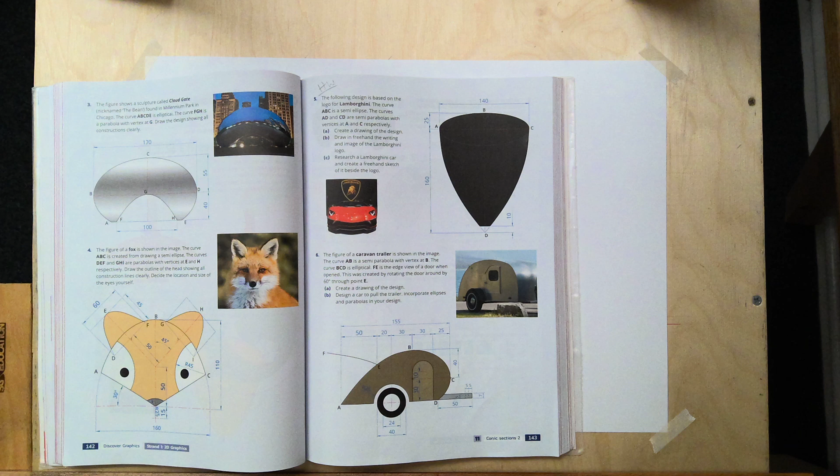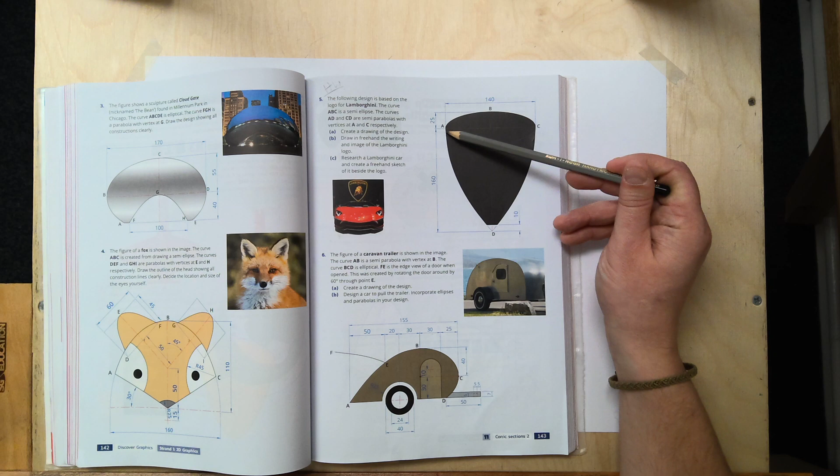So today's video is page 143, question 5 of the conic section 2. And we were looking at the Lamborghini logo, okay? So this is a combination now of our ellipses and parabolas. So semi-ellipse, okay, and two separate semi-parabolas, all right? So you have to be very careful. It's all about reading the question.

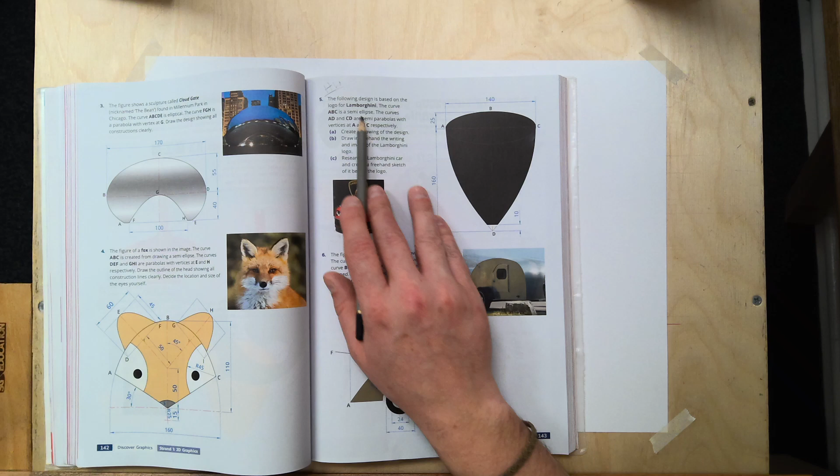What you'll do as well is work it in the order of what they're asking us. Draw it in the order of what they're asking us. So the following design is based on a logo for Lamborghini. The curve ABC is a semi-ellipse. That's the first thing we'll do, is the ellipse. The curves AD and CD are semi-parabolas, so meaning they're both separate to one another, with vertices at A and C respectively.

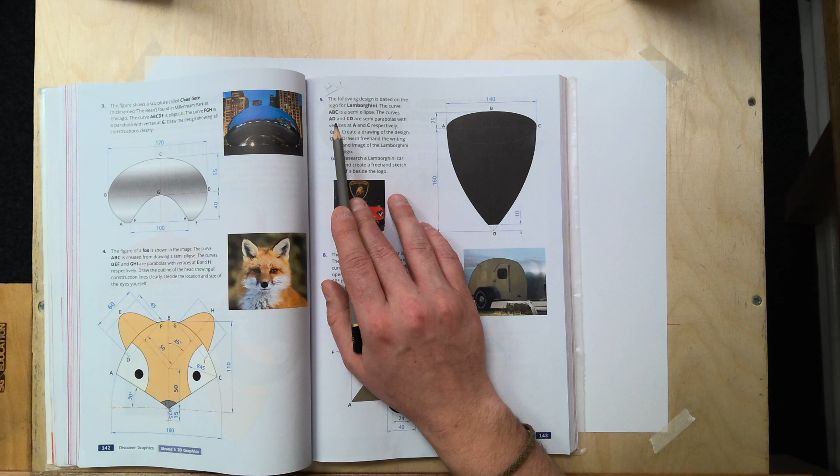So this is very important, where your vertices are, okay? Where we see our vertices, that's when we don't make mistakes, when we know what we're doing. So first things first, we're going to look at ABC, doing the semi-ellipse. So give myself enough room from the top. All right, so we're going to do our light horizontal line across. I'll make it just a little darker so it can be seen on camera. And we're doing our vertical line now as well, nice and light.

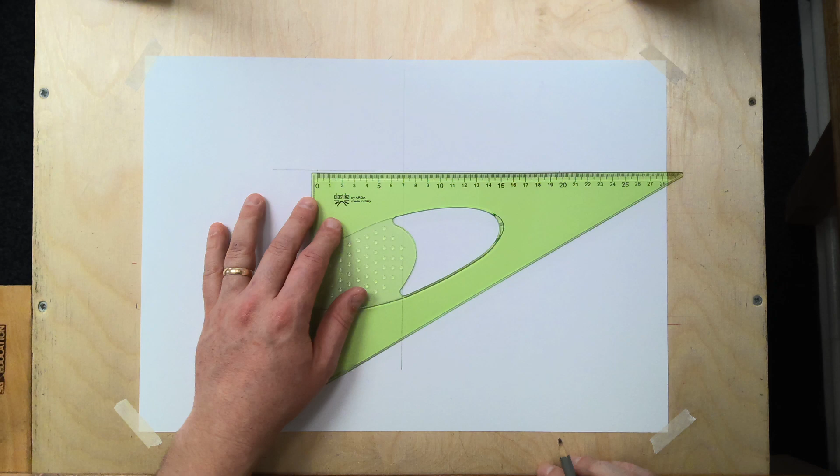Okay, so this is our first shape, our first setup. Now, we have a major axis and a minor axis. So the full length of the major axis is 140. So you split that then, 70. So along that line, we're going to measure out 70 millimeters. Now it gives us half the minor axis, which is 25. So that means we're stepping up 25, because that's where our minor axis is. So that dot there, that is B straight away. This dot out here, this is A. I'm going to find C now in a second.

So, nice and handy. You know how to do your ellipses, so you get your compass, put it where the crosshairs go, stretch it out to A. Semi-ellipse meaning half, so we're going to do a semicircle then, top half only is needed. Where it hits here, that gives us C. Now we're going to swing our semicircle at B, radius 25. There's that one. Probably a little bit dark there, but it'll be alright.

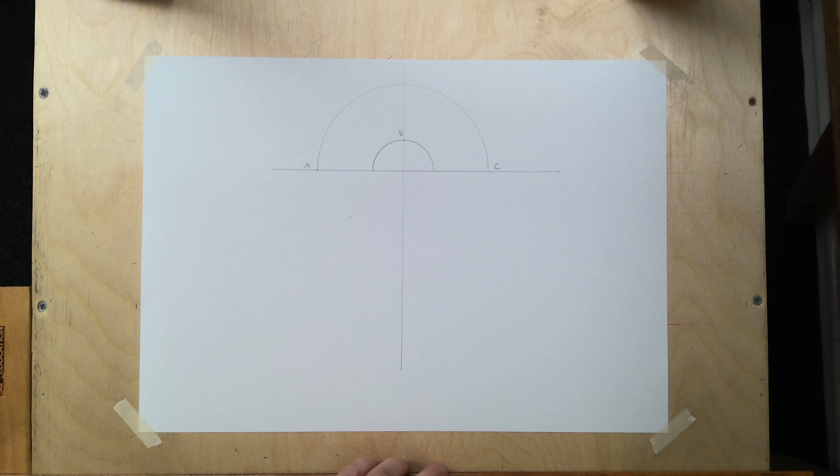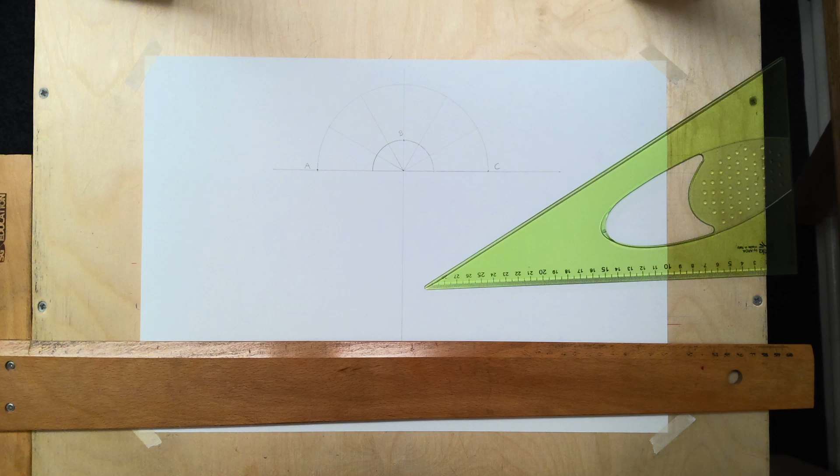Okay, now, our usual divisions, 60-30. Quickest and easiest way to divide a circle. There's 12 segments there, just like a clock. Alright, so there's our divisions, the top half done. So we already have 3 points, 1 point at A, 1 point at B, and 1 point at C. Alright, now where people can make mistakes is, where do we go? Do we go over and up, or what way do we go?

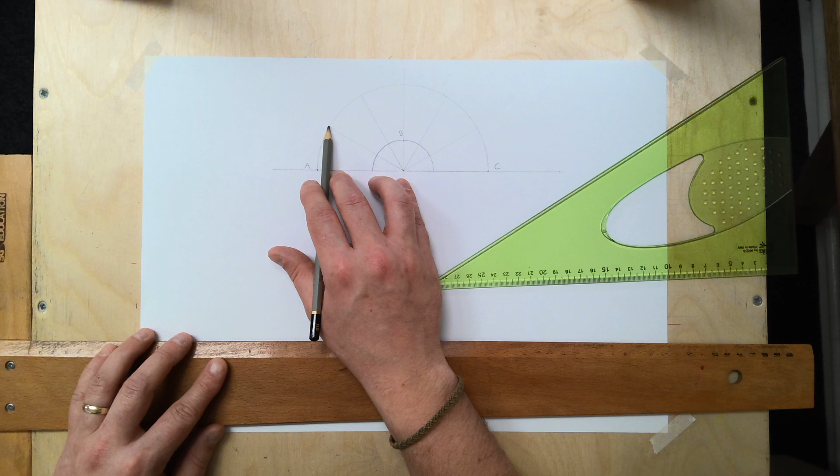So you have to remember, where our division line hits the major circle, the big circle, you go parallel to the minor. So this is the major axis, this is the minor axis. So where this line goes out here to hit the big circle, we go parallel to our minor axis. That means we're going down. Okay, so that's how you know. Down, parallel to the minor.

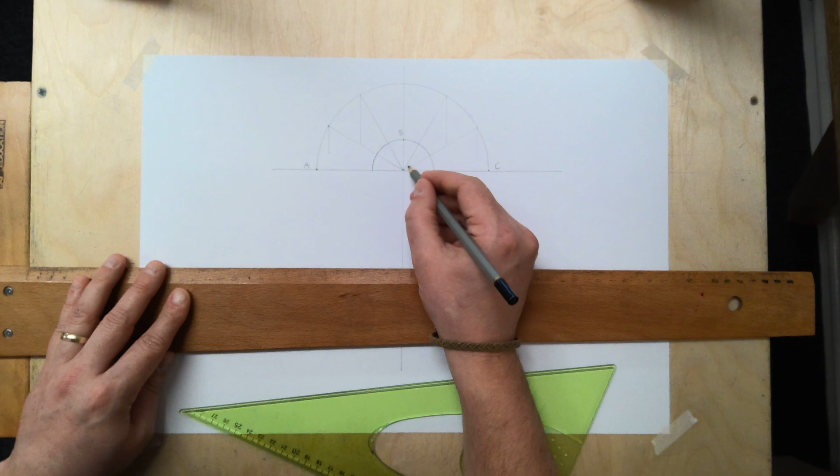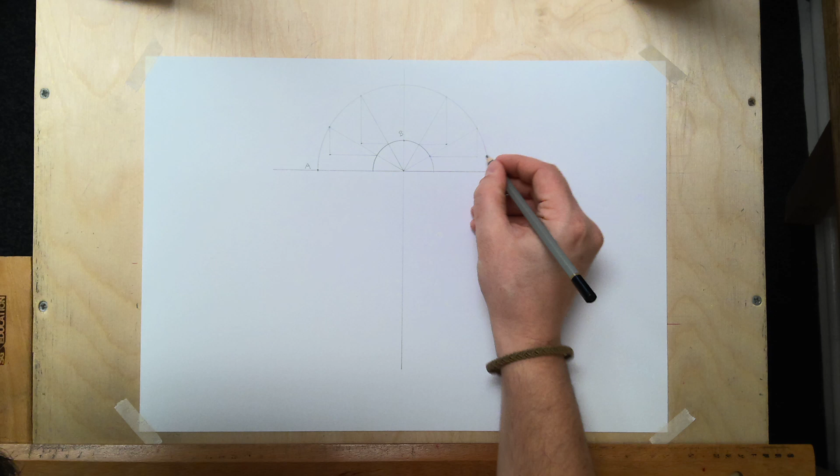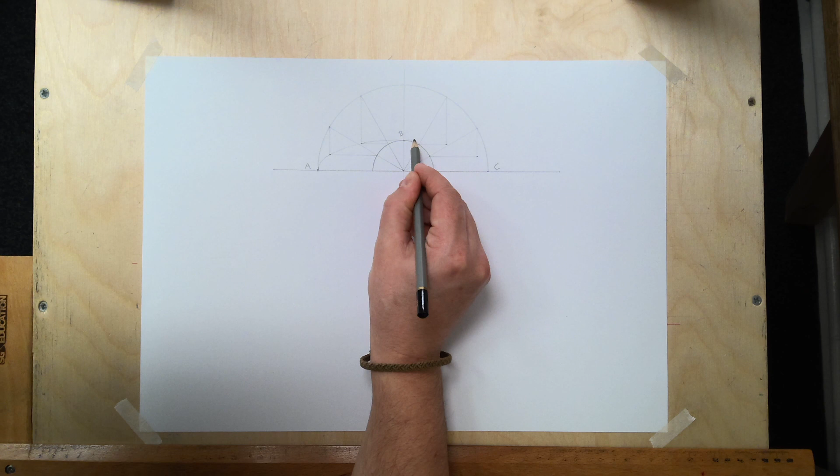Now, where this division line hits the small circle, the minor circle, we go parallel to the major, which is using our T-square, horizontal line. There we have it. Out and down, all our points found. Try to keep it smooth and not jagged if you can. Do it light first. If there's any mistakes made, you can just get the rubber and rub them out. Do it light, so at least then you can get your path in of where it's going, and then you can heavy back over. Remember, it's as best as you can.

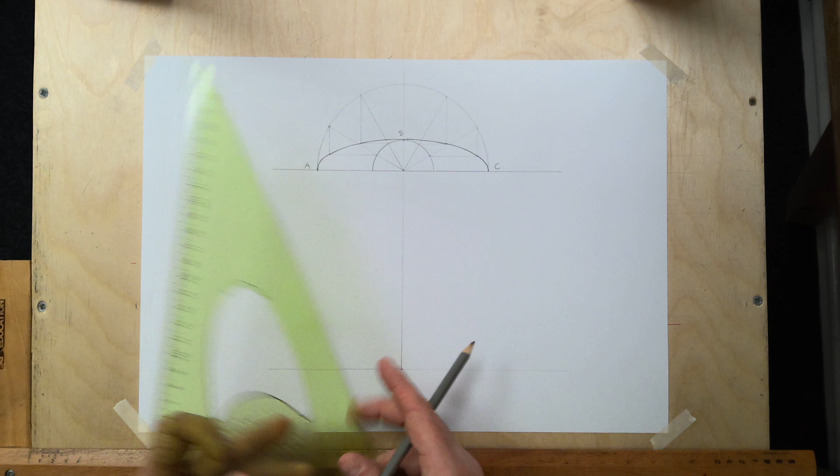Now, there is our semi-ellipse. Now, time for our parabolas. So it's down 160. Down 160, and you're going to make that into a rectangle. Now we're only going to do one of these because we're going to mirror them, because this is our center point here. This will be like our fold line, our axis, and we can flop it over in a second.

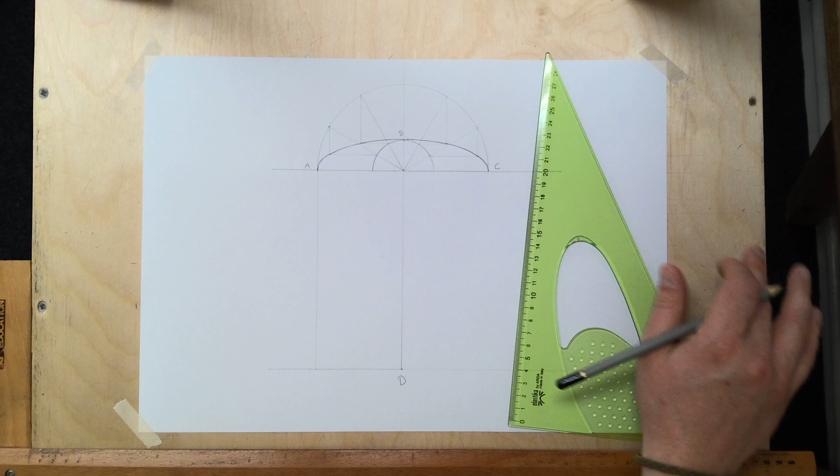Where it hits down here is D. So AD is one parabola. DC is a separate parabola. So they're saying they're two semi-parabolas. Now, A and C are the vertex.

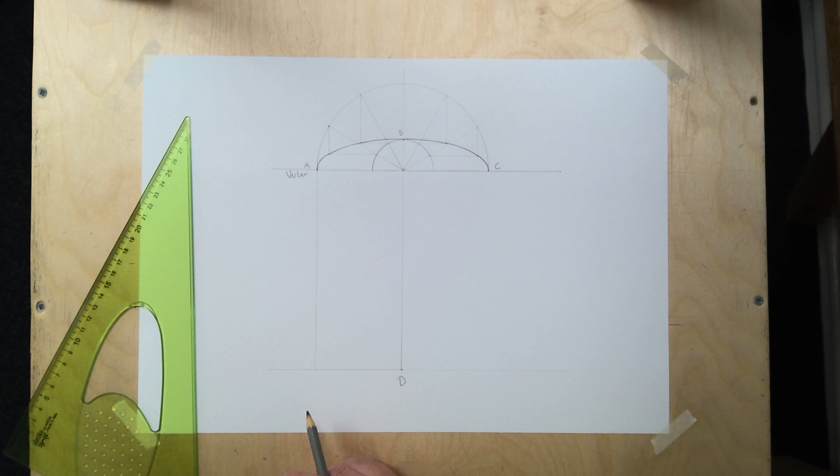So the vertices, vertex and vertex. Alright, so we're just going to work on one. So that's extremely important, the vertex. Now, we don't want to get confused, we don't want to get it wrong. So, like I always say, so you'll never get it wrong, the easiest tip I can give you is, wherever the vertex is, put your pencil straight away and draw a line out at any angle.

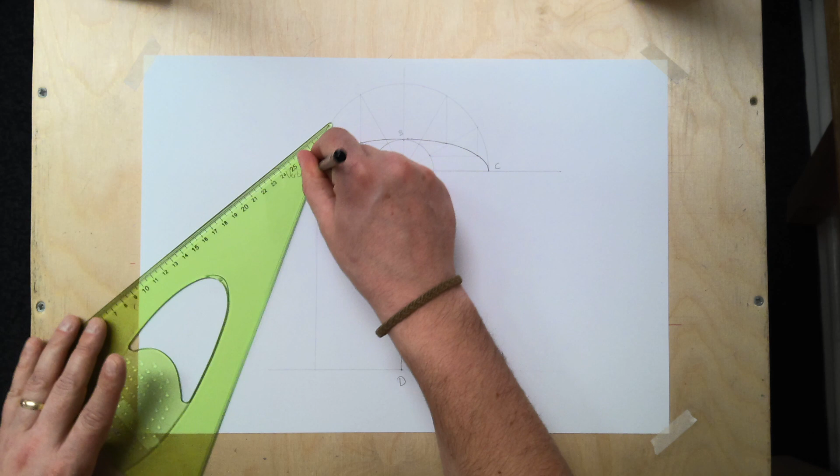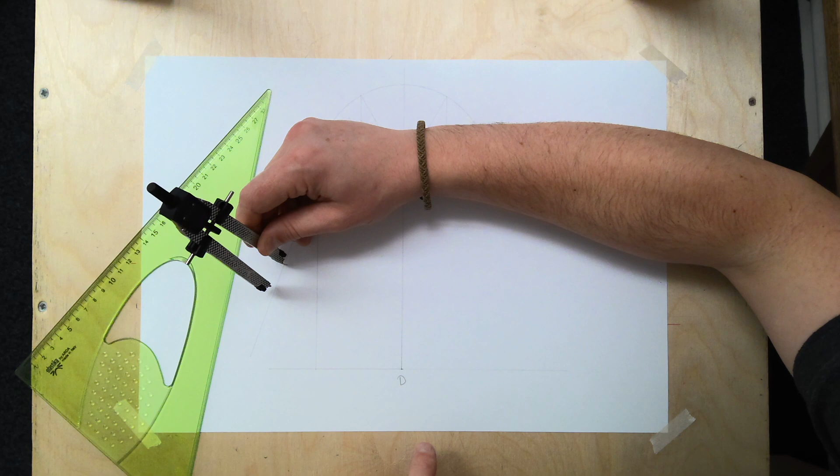Alright, this is going to get us to do divisions of a line here, and it eliminates any possible mistakes we made. Pencil at the vertex, bring a line out, any angle. We're going to pop it into 5 segments. So, get your compass, any distance on the compass, step it out, and then move the compass. So move the steel part of the compass, keeping that setting on your compass. Move the steel part to each arc, and you're going to pop it out 5 times. So 1, 2, 3, 4, 5. 5 times along that line.

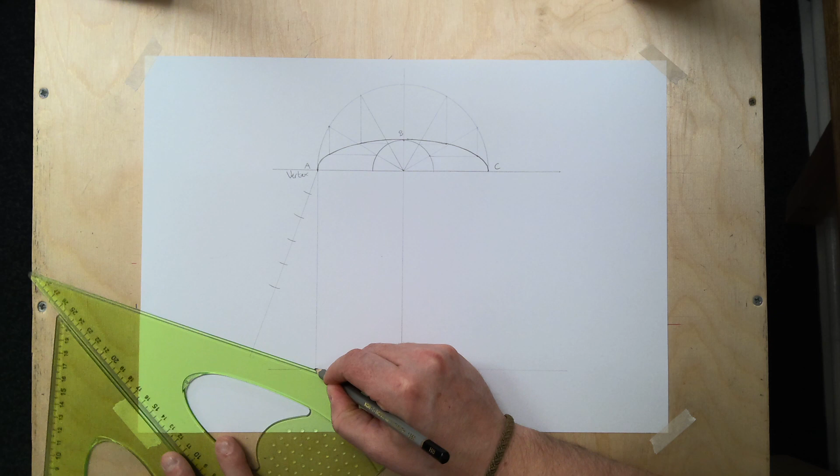Alright, now sliding set squares is the next step. 2 set squares together. Again, it's all just about little tips and bits to speed you up. Pencil at the bottom of that cube, or at that rectangle, alright? And rotate it up till you get to the last arc you swung. Not the end of the line, the last arc you swung. You're going to lightly join them together.

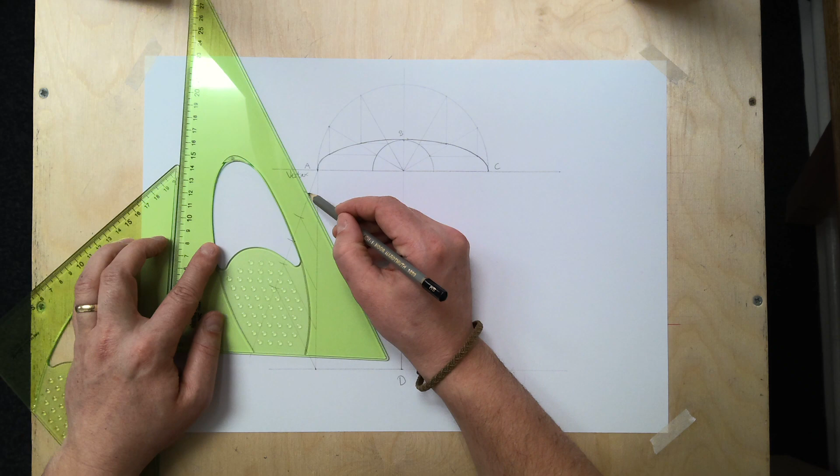Now you're going to go sliding set squares to each one of these. It's all about trying to come up with ways to make it quicker, easier, small tips just to help us along the way. Alright, so there is my 1, 2, 3, 4, 5 segments done. Now what we're going to do is we're going to do the same again from D.

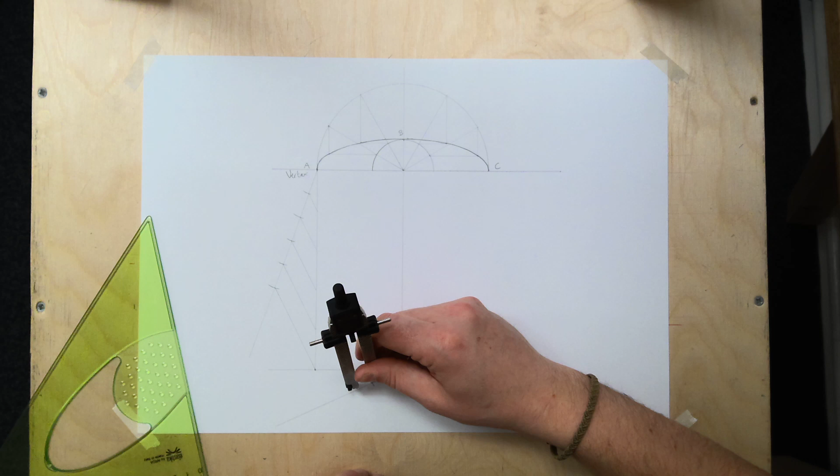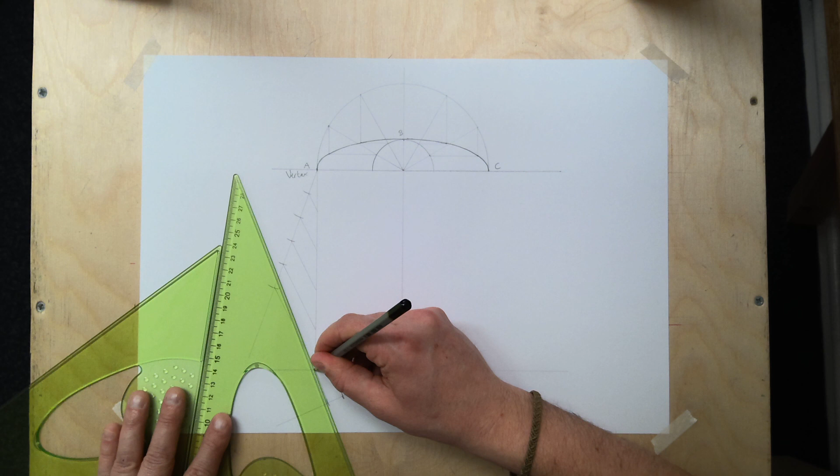Send a line out, any angle, compass, set it to any distance, starting from D, swing it, move the steel part over, swing it again. 5 times again, okay? One, 2, 3, 4, 5. Last one, so pencil on the corner that we need, line up our 2 set squares together and rotate it till you get to the last arc that we want, bring a line. Alright, so there we are there. Now, sliding set squares, each one.

This is doing division of a line now, first of all. That's the main thing. So what we need to do is divide that line into 5 portions before you do anything else. Now we have the 2 lines divided. Alright, the reason I went and brought a line from the vertex is we don't make a mistake from the top, because one set has to go back to the vertex. Because I divided this line, it cannot go back to the vertex. There cannot be a mistake made then. So what we do then is we take the ones we can move, which is at the bottom line, and we can send those up to the vertex.

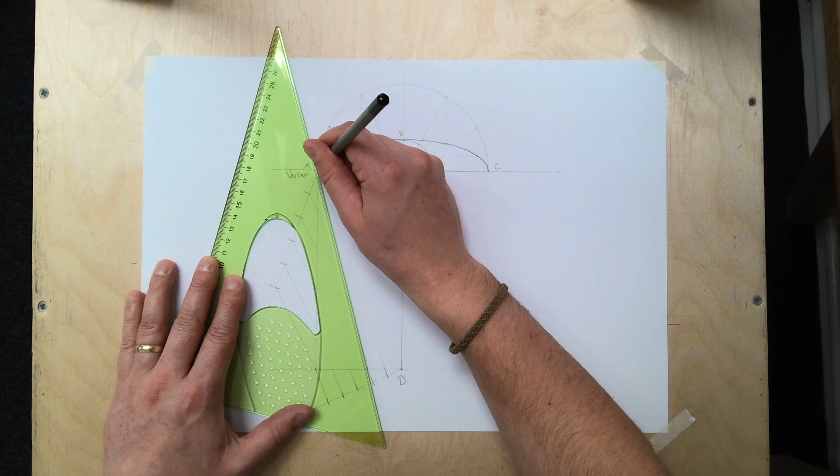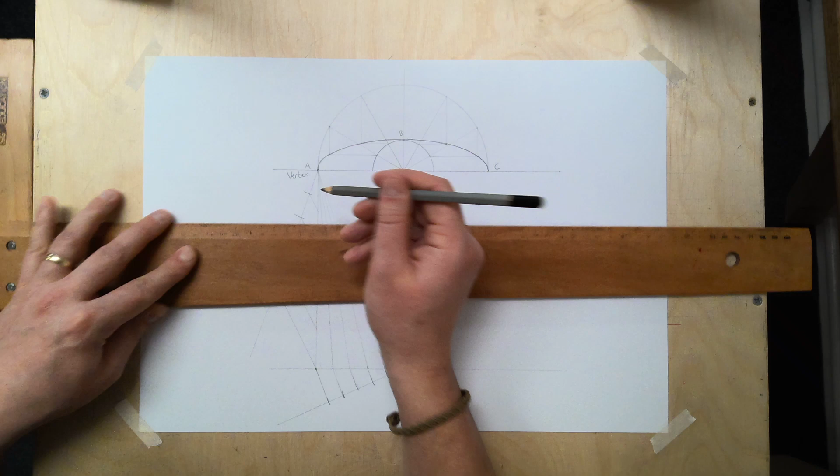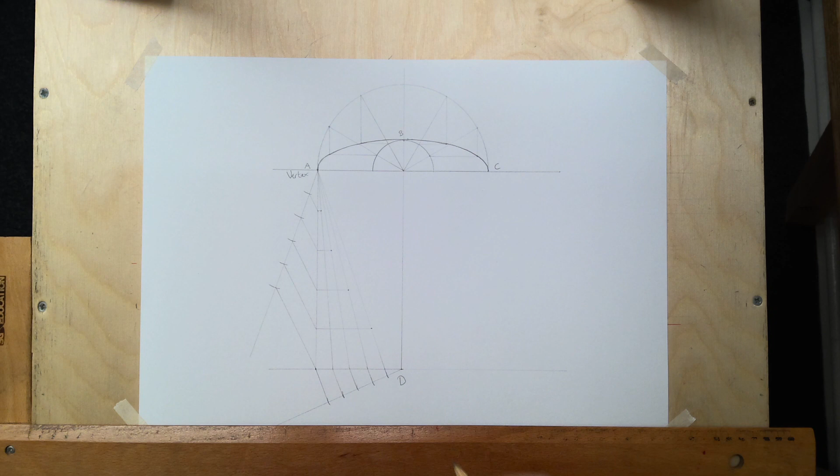Alright, just in case it might be a little bit light now, sorry. So that's those ones sent up. And our other ones, these ones here that we had going down the way, bring those out. So first with the first, second one with the second one, third one with the third one, and the fourth one with the fourth one. Alright? Now I know the bottom piece gets chopped off. We're just going to draw it all first, and don't worry about the chop at the end. Again, do it light first, and we can go over it then.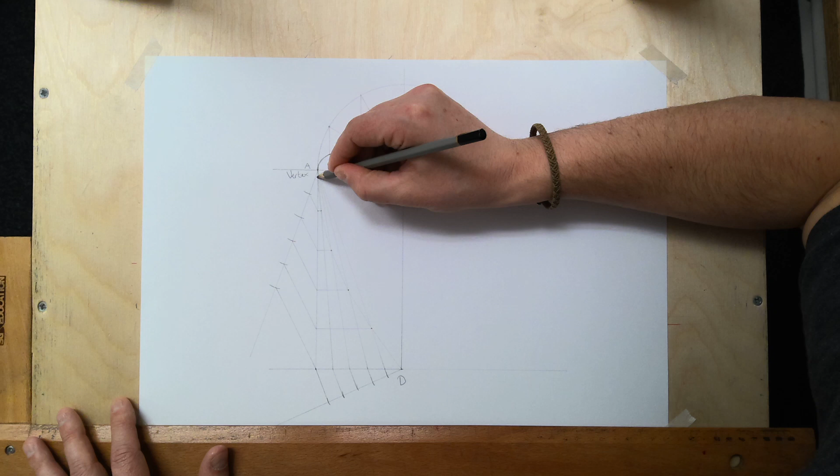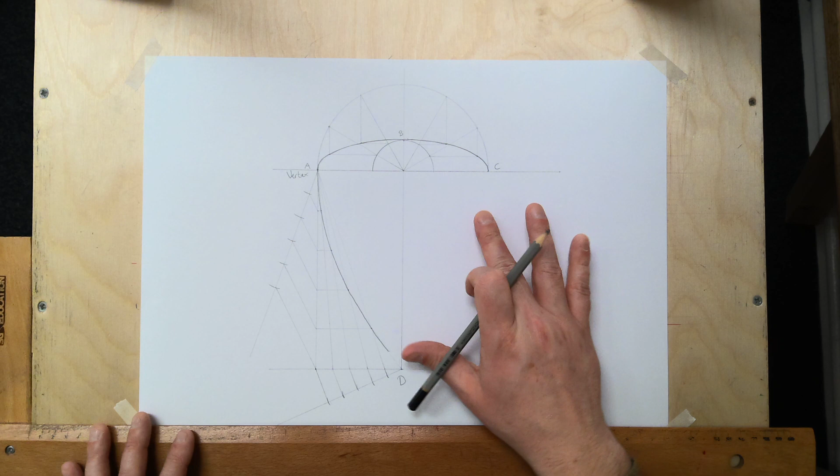I'm just going to stop a little bit short without making it full heavy, because we've got to chop that off in a second. Alright, so that's then brought down. Like I said, I'm going to mirror image them onto the other side. So I'm going to take this one, I'm going to send it straight across. Each point that's on that, I'm going to send it over to the right hand side, just like we would a normal parabola. Alright, it just means we speed it up by not having to do it a second time. Use our axis here.

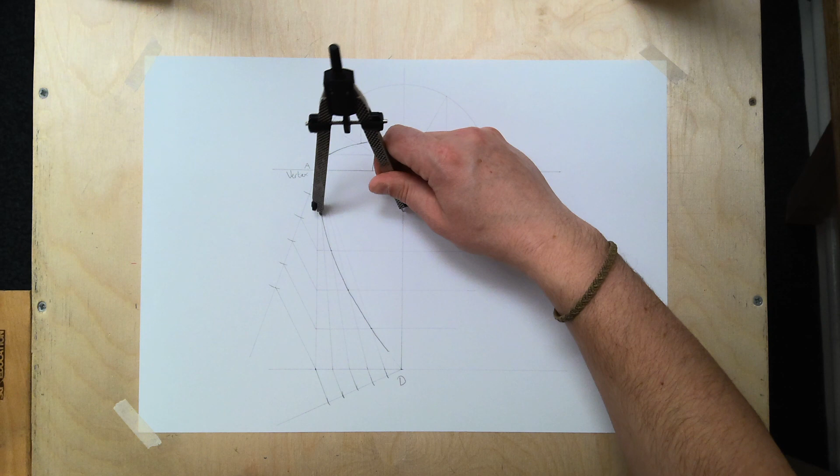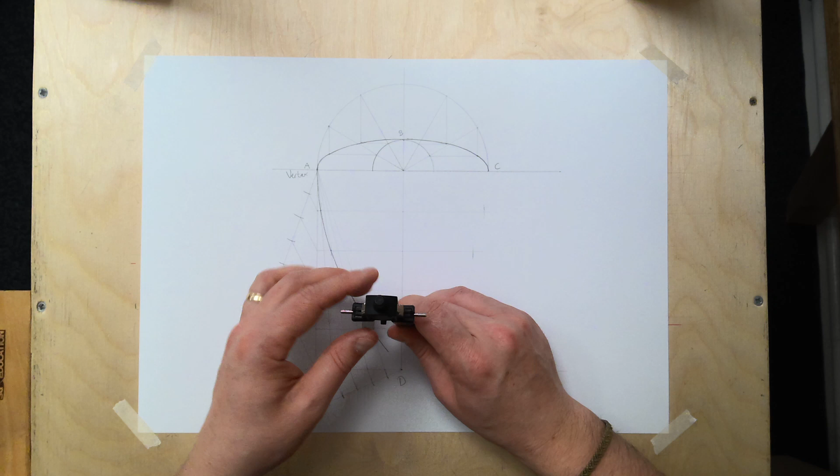Alright, so axial symmetry on this one. There's that point. Swing it around. There we go there. Down to this one. Swing it around. Last but not least, swing it around. There we go. Now, there's all our points. Repeat the process. Get that swoop up. Move the sheet if you have to, or whatever it may be for yourselves. Alright, to suit.

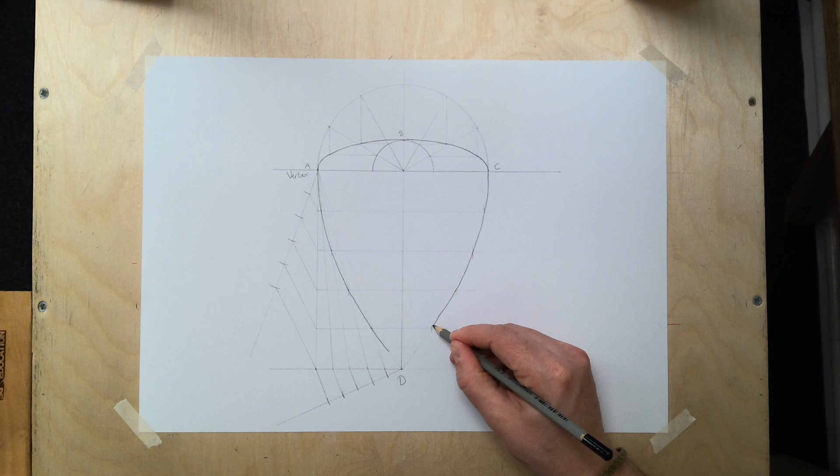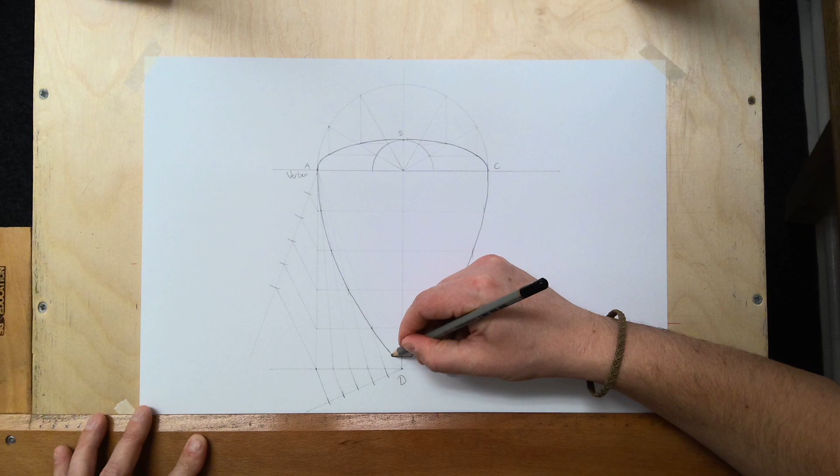We're going to stop it short now again, alright, because the bottom's going to get chopped off here. Last but not least, the bottom, it says there, step up from the D there, step up 10 millimeters. Because we've brought this line first of all, we know exactly where it's going to go. Now we can close that off, and we can close that one off. Now, there you have the Lamborghini logo. So it's page 143, question 5. All right.